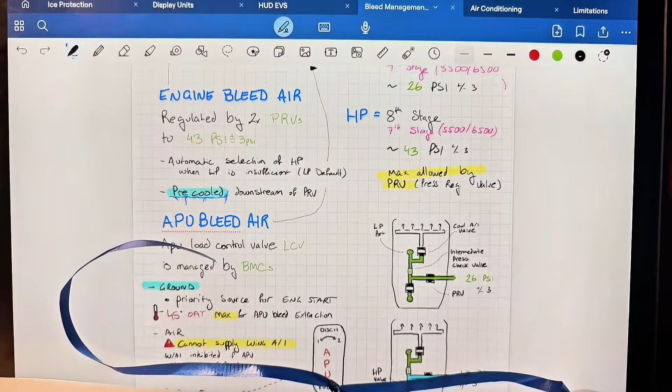So here we are. We finished ground school and we passed once again. I want to share with you my note taking on the Global, what's been really helpful to me, and how you can do the same very easily, I guarantee.

What I stumbled upon a couple of years ago was an application called GoodNotes. It's gone through a couple of iterations, but really it's been working really well. Over the years, they've been continuing to improve on the application, so much so that it's become my favorite note-taking application for everything that I do.

Now, I'm a note taker. When it comes to learning, I have to. You'll see that my notes can be scribbles. I like to do a little bit of doodling and art, but that's the kindergartner in me. That being said, some of us are audible learners, visual learners, and so on and so forth. You can see that this application covers everything.

So this is not going to be a fancy video. I'm so sorry, I don't have any fancy lighting or recording devices. It's me in my hotel room trying to show you how simple it's going to be.

So the first thing that you'll notice is just the organization. When you're coming to GoodNotes, you can download this on the App Store, but I believe that now it's multi-platform, so your things will populate across devices. You can have multiple folders.

For me, for example, this week I've been living in the Global Express folder. Now I've got a couple of different reference folders where I keep notes. So every single one of my sim sessions, you can see here I started taking notes back in 2021. Every year I keep my notes so that I can learn from the previous sim session and prepare for the next one.

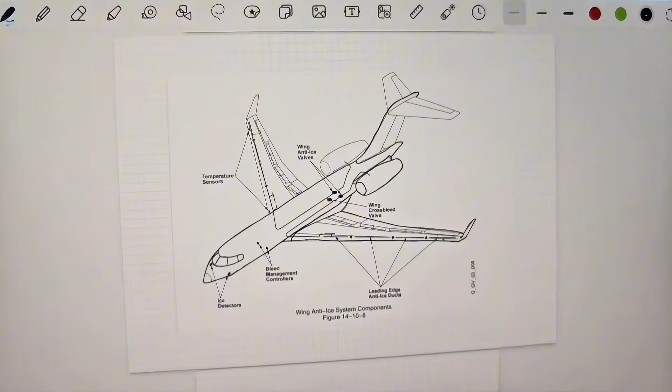Here, I've simply taken a screenshot of the FCOM and I started literally just tracing around the aircraft. Why I do this is because ultimately it allows me to start putting my own notes without all of their own arrows. I could do something akin to, let's see here, for example, if I go to hydraulics, I'll show you exactly what I mean.

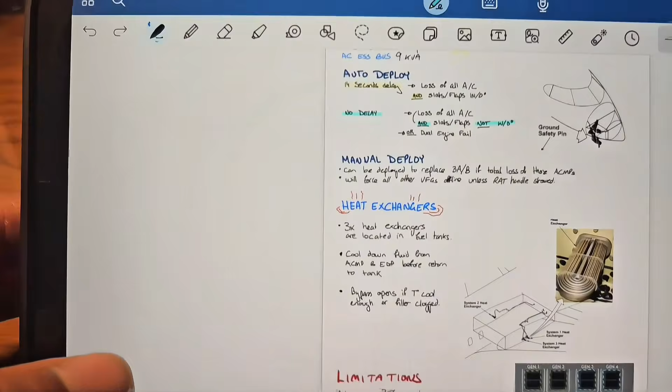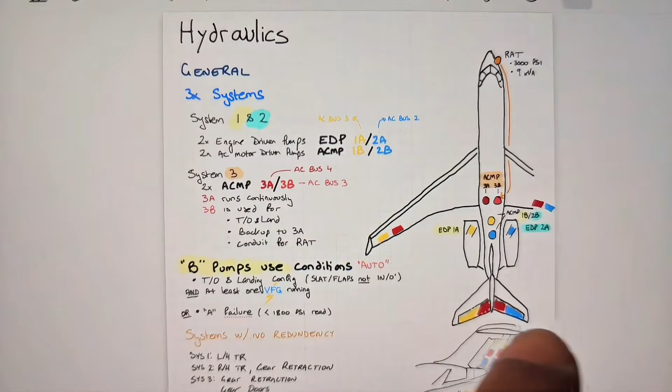So by tracing the aircraft itself, what I can do is something like this. Here I have traced the aircraft, and I can start putting my own notes on the systems and everything, and make the links as I want them to be.

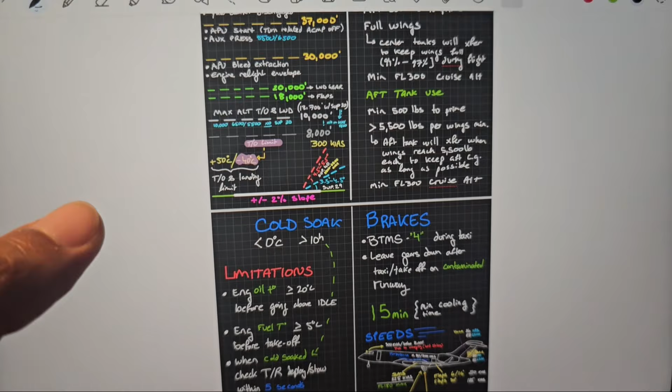Additionally to this, I want to show you a different way of doing it. Some people might want to separate their notes in a slightly different way. Here, for example, I split the limitation page in two, just to be able to put more material at the same time. And I started to put all my limitations for the aircraft with the differences.

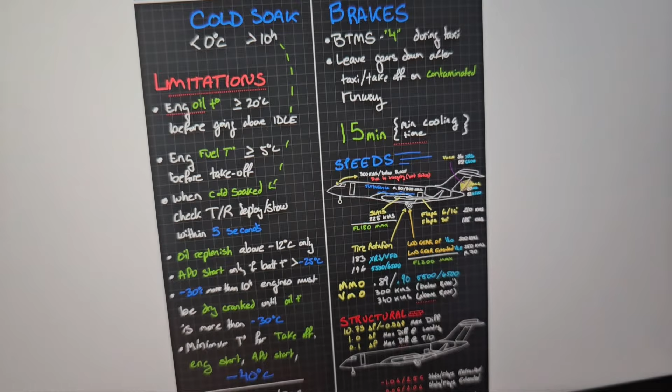And here, once again, how do I do this? Well, simply superimpose a picture from the FCOM of the aircraft and then trace over it. It's that easy, and it allows you to do different things, such as putting your notes.

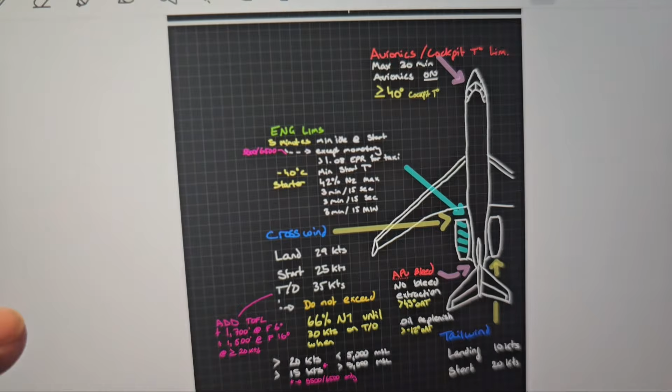So again, superimposition, and you can see that this is a dark template, dark squared, whereas I've started using more and more white, simply because the pictures coming out of the FCOM are white.

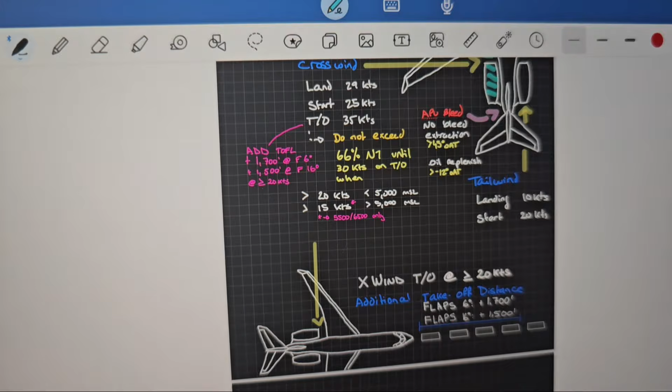Now, some of you might be asking me, well JD, this is a very fancy setup, I probably can't do this, can I? And the answer is yes, you can. Most new EFBs nowadays come with the stylus, and if it doesn't, it's a very cheap investment which I would highly suggest you do.

Now, the biggest thing you can do to make this setup work for you is the screen protector. There's no particular brand in specific that I can recommend. Just look for a screen protector for your iPad, your EFB, that goes along the line or is called something like Paper Feel. You'll find on Amazon probably any sort of companies that sell you a Paper Feel screen protector for your EFB, for your iPad. Find the right one for your model and put it on.

And what I can tell you is that it turns that glass surface, or even any other screen protector that feels more like ceramic or plasticky, and gives you a little grit on it that makes a world of difference when you're writing, and makes it feel so much more natural. So that is by far the best thing you can do.

Now let's keep going, because that's not all. One of the features I've enjoyed, for example, is the ability to record lectures while I'm listening to them, or when I'm in class. So you can quite easily start recording, but here was one of the recordings from the fuel class from last year. Just keep it simple.

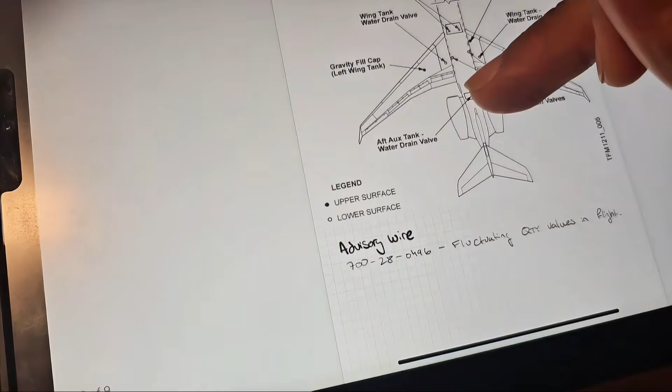It's perfect for learning. So we've gone through a couple of things like the masking tape feature, the audio feature. We've talked about bringing in synoptics or pictures that you can trace over to write and create your own notes as you go. I really like it - to me it's a super powerful tool that allows me to be really flexible, bring things in that I need to either trace over, make my own notes, and learn from in my very own colorful way.